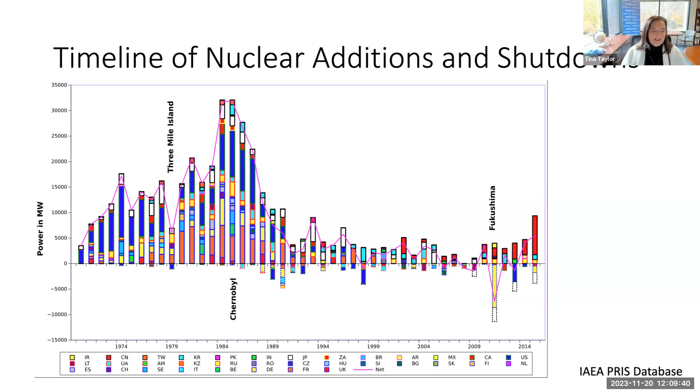So I want to help you to understand how and why things slowed down for quite a while, and that has an impact on where we're going in the future. So I mentioned most of our build happened in the 70s and 80s, was slowed down a bit after Three Mile Island. There weren't as many new starts. And after Chernobyl, some plants that were even planned or underway were canceled. So there was a slowdown in the growth of the fleet.

And then in the earlier part of this century, there was really a real slowdown for nuclear, where plants that were already built were shutting down, and kind of two reasons for that. One, as I mentioned, the Fukushima accident caused some countries to change their policies on nuclear. So a real example of this is Germany. They decided to shut down their entire fleet of nuclear after the Fukushima accident.

And then in Japan, new requirements were put in place to shore up their plants from impacts from tsunamis, which was the cause of the Fukushima accident, and from earthquakes. And that has required many plants to build large amounts of infrastructure for the Japanese plants that will allow them to restart. And right now, I think it's about 10 plants have restarted and another 9 to go. Not positive on those numbers, but that had caused a slowdown.

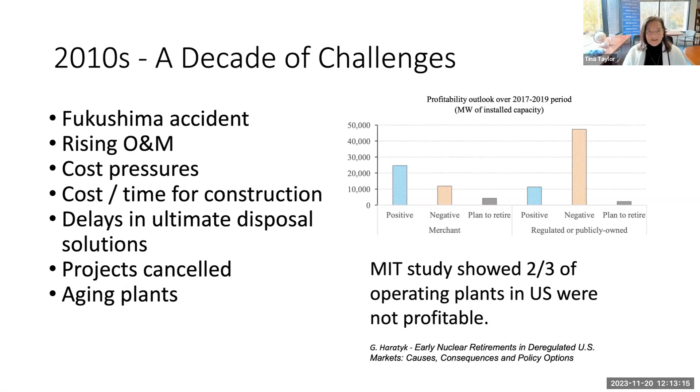And then going into 2020, we started to see these renewed opportunities for nuclear. And some of the drivers I'm sure you hear about every day these days: there continues to be an increasing focus on climate change and carbon-free electricity, huge needs to decarbonize not just electricity, not even just energy, but the whole economy. Continual issues that make us all aware of the need for robust and resilient energy systems. We've had storms, we've had power outages in different parts of the world. There's continual rolling constraints on need for more and more energy.

As we start to see the initial phases of electrification, that's causing more demand. I'll talk a bit more with some examples on industrial applications for nuclear. There's this whole growing industry around future low carbon energy carriers that will create a large demand for hydrogen, maybe ammonia, that could be produced by nuclear.

And then, there's been change over the last few years. We see a lot going on in geopolitics that really impacts the energy sector. So things like the war in Ukraine, for example, have caused impact to the energy sector all around Europe for many reasons. The energy flows have changed. There's been constraints on gas flow to different countries that trigger changes in the cost of electricity. It really has changed the flow between countries across Europe.

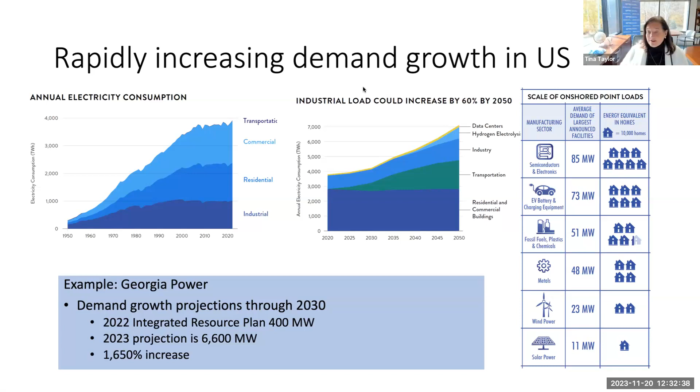France, I mentioned, has one of the biggest nuclear fleets in the world. They completed a large build. They had some new designs. They had, I think, one plant under construction. They're now going even more all in on nuclear. They announced this summer a plan to build 6 new large plants. It's a $52 billion program that they're investing in there, and they know they're going to need more beyond those 6.

Sweden had actually been in that phase where they were shutting down some of their plants. They shut down a couple of the older plants and didn't foresee a growth in electricity that was going to need them to build more plants. But just in the last couple of months, they've really shifted their plans going forward. And now they're planning a, quote, massive expansion of nuclear energy.

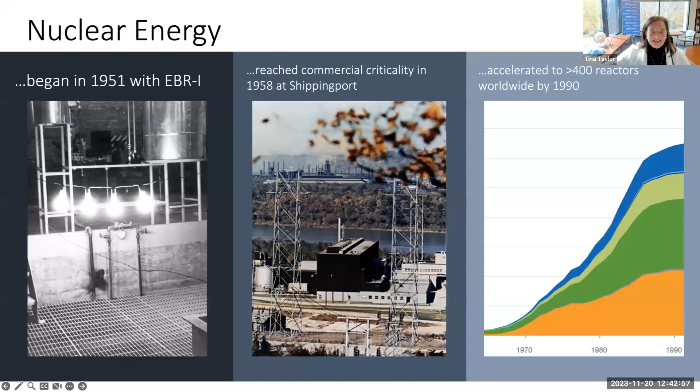So as I go into the future, I want to just hit again on this aspect of scale and what we've done before and what we need to do in the future. So nuclear energy in the US, there was an initial successful test in Idaho, I believe, in 1951. And then just 7 years later, we had our first commercial plant. That's not going to happen these days. Things do not move that fast anymore. And then from 1958 to 1990, we built over 400 reactors around the world. So a very rapid increase happened during that period of time. But that was 30 years to build 400 reactors. And if you think about what we've talked about so far, this idea of tripling from now to 2050 is a much greater challenge than that.

And we have been operating under this flat, very slow growth mode for such a long time that really shapes the industry we have today. In the US, there is now completing this one build of one plant, a 2-unit plant, Vogtle. Over the last 20 years, that's been kind of the sum total of nuclear construction in our country. Those plants are now finishing, and there is not another plant being built tomorrow for that workforce to just migrate to, even if that was feasible.

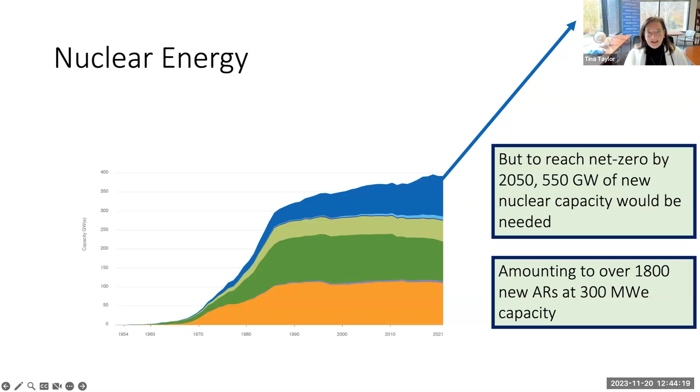So just try to have an appreciation for the fact that the slowdown, the stagnant, relatively modest growth that we've been under really shapes what the capabilities are to go on this rapid expansion. And I think that we will see a lot of reality seep in to some of these ambitions as we try to bridge that gap between a slowly growing, stagnant industry and one that needs to scale very quickly.

Kind of keeping on this theme of the amount of nuclear that's needed to be built. This chart, I think, probably has the same information as before, but you can see that the peak year for putting new nuclear on the grid was in the mid-80s, where we put just over 30, equivalent to 30 large plants on the grid.

And if we're going to meet these goals going forward, we know we can't go from 0 or 5 or 6 per year now to 30 immediately, but we will need the entire infrastructure to be able to build these plants to grow very rapidly, to get to any of these targets by 2050.

And we'll need to be doing every year from almost the immediate future to 2050 as much nuclear build as we have ever done around the world before. And I would say we have not been on a trajectory to ramp up to that point. So it'll create some of the challenges.

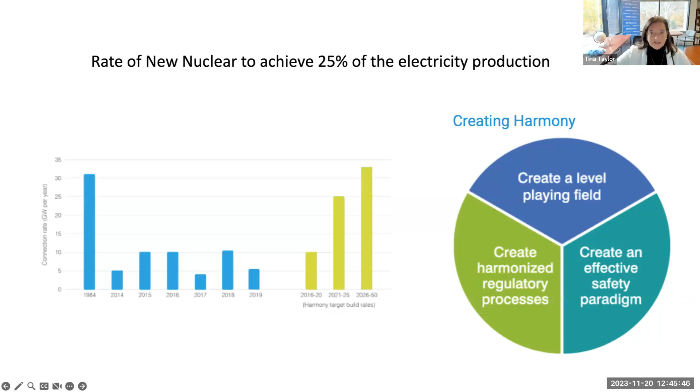We'll see. Most of what I've talked about so far is really aimed around electric production, but I want you to also know that industrial momentum is underway here. So most, if not almost all, of the nuclear plants today create electricity. That electricity goes on the grid and it gets used for a variety of things.

As we're moving forward, there's this desire and need maybe for many industries to be more directly coupled with nuclear. And there's some advantages to that, and some challenges to that. A big wave is coming in the IT and data space, because that industry itself is so rapidly growing. The, I don't know what you want to call it, revolution this summer over AI and ChatGPT and things like that is probably exponentially increasing the need for data centers around the world.

And those data centers and the companies that run them are under this same desire and constraint and regulation to become carbon free. So there's been a lot of work going on this summer, particularly around coupling nuclear with data centers directly. So a few announcements here. NuScale just announced a partnership with Standard Power to build 24 small modular reactors to power their data centers.

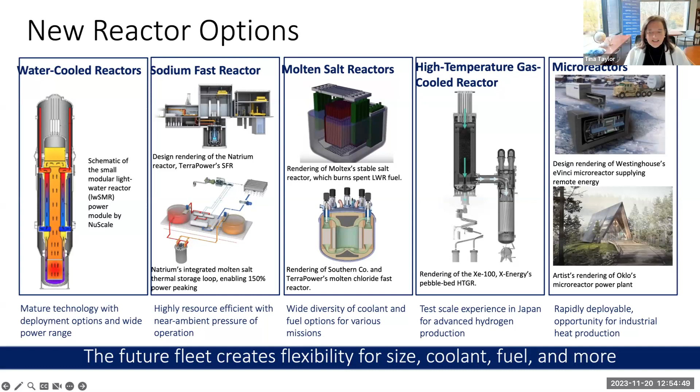There are many different designs out there. I'm not going to try and get you to understand all of these. Most of these designs, I will say, have been really fueled by this investment in the university system and in educating more young people who are then entering the workforce with entrepreneurial spirit, with a desire to save the world with clean energy, and a knowledge about nuclear, questioning how we can do nuclear better than we've ever done it before. So lots of new designs, lots of new companies emerging, lots of innovation in the technology space.

There's even innovation in the business model. One of the companies out there that I find very interesting is Last Energy. They have a design that's not really very new. It's a scaled down traditional kind of reactor. But they have been able to procure power purchase agreements for over $18.9 billion worth. And they're not doing it by selling people nuclear plants. They're doing it by selling people the electricity and the energy from nuclear plants.

And by really focusing on what they believe is a very easy to license and easy to construct small modular approach to providing that energy. So I'm very interested to keep my eye on them. They're doing something very novel out there, not so much on the technology side, but on the business side.

But here's the reality of where things are right now. This is actually a slide I used with you last year to talk about the new things that were underway. Some of it's positive and some of it's really slowed down. So TerraPower is planning to build a plant in Wyoming.

That project is delayed just by a couple years, I think, at this point, but it's been delayed. Just last week, there was an announcement of this, I don't know what to call it. It was kind of like the poster child for a good nuclear project. NuScale had been working with a utility called UAMPS in Utah to plan this carbon-free power project. This is the project that was highly supported by DOE to help with licensing and permits and design finalization. And last week it was canceled.

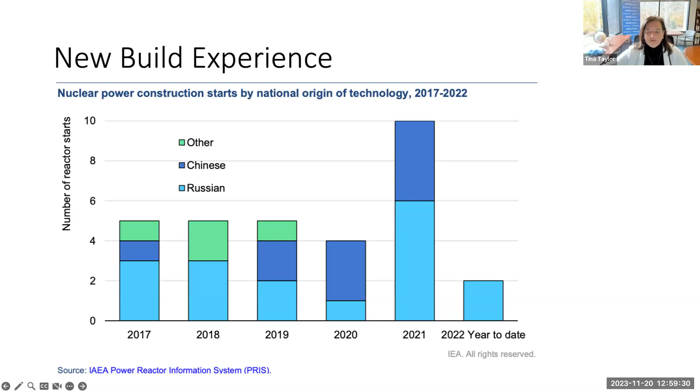I'll just mention most of the new build experience really has been with Russia and China, and that creates more of this challenge as many countries around the world are seeking to add new nuclear. And there's geopolitical tensions that dictate who will and who won't work with Russia, who will and who won't work with China to try and move their projects forward.

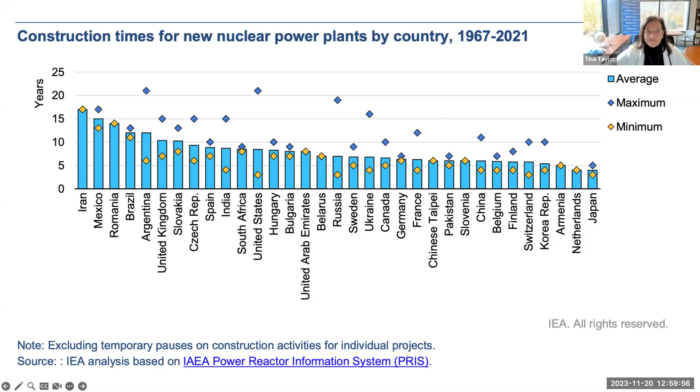I realize I'm running out of time here, so I want to hit a couple more points and then have plenty of time for discussion.

The need for cost certainty is huge. And that definitely contributed to the carbon-free power project I just talked about, because over the years, the estimate for what that cost would be for the electricity increased. And the cost, I think, could be high, medium, or low for nuclear to still play an important role in future energy decisions, but the cost can't be uncertain if businesses are involved.

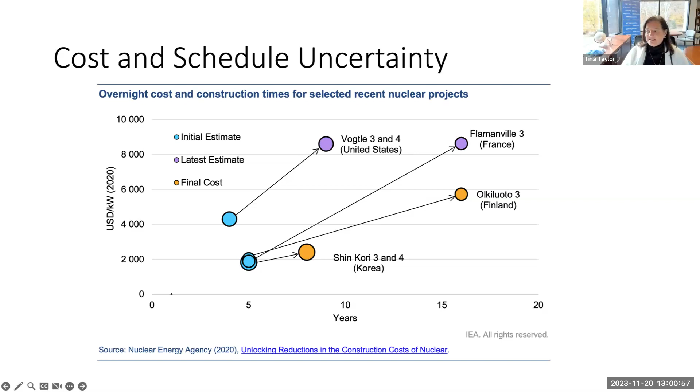If it's government programs, which is how it works in many countries around the world, then there's a bigger ability to bear that changing cost structure. But for businesses, they need cost certainty, they need schedule certainty to plan these. So those are some of the concerns and considerations.

Supply chain concerns are growing. They're growing rapidly. Maybe they definitely started in the nuclear space with the build of the Vogtle and the VC Summer plant, where the VC Summer plant was canceled. The lack of a robust supply chain impacted those plants on schedule, impacted those plants on costs.

I think we all became very familiar with supply chain impacts as we went through COVID and couldn't get toilet paper sometimes and couldn't get meat sometimes, and other times you couldn't get chicken. And we've been really living with that for the last 3 or 4 years, I think, as prices fluctuate quite a bit for the things we need to buy, and there's difficulty getting things at different points in time. It really heightens your awareness.

And this is probably the biggest discussion underpinning that reality check on all of the nuclear growth discussions that I mentioned. There's a lot of realization that a lot of work needs to be done to build the supply chain to support any of those nuclear ambitions. And this is all kinds of things. This is the large specialized components. It's companies that can perform work to a nuclear quality.

Workforce is a huge gap people see, both from the need to have highly educated, specialized workforce, and also just the trades, the people that will weld these plants together and pour the concrete. Big gaps to be challenged there. There's challenges in fuel.

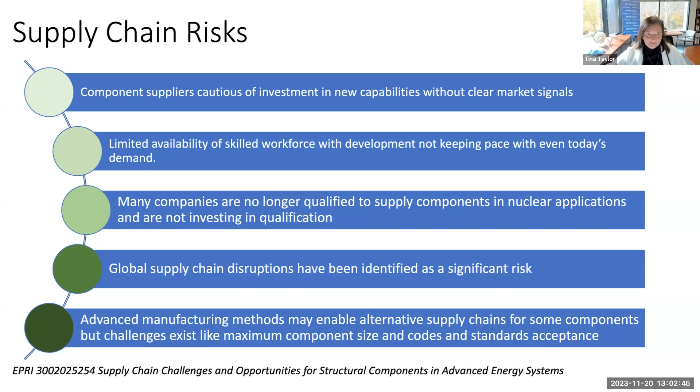Some of this is driven by geopolitics, particularly with the Russia-Ukraine situation a couple of years ago. That introduced a big shakeup in the uranium supply chain around the world, and that has led to a steep increase in the cost of uranium, which then kind of circles back and increased the cost of the production, the projected cost of electricity from these plants.

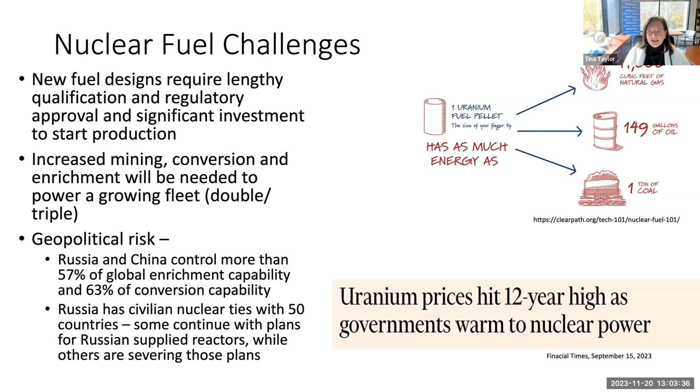The US government and other governments have been ramping up activities to create more production, but that's really probably only sufficient for the current fleet and moderate growth. As we start to encompass these very large builds, we're going to have to address this as a critical part.

Regulation is very important from the timeline of things. I'll just say that many countries are just standing up their regulatory paradigm. And the current idea of licensing every single plant individually will either create a huge slowdown, it'll create a need for gigantic staff at the regulator, or we've got to do it differently to support a very rapid succession of approvals and proper oversight for a rapidly growing fleet.

So I hope that that's given you a good feel for kind of the positive and some of the challenges. Personally, I think the future is full of opportunity. But there are these challenges that'll need to be overcome to actually unleash that opportunity for nuclear.

So let me just check the chat for a few questions, and I'm happy to take questions verbally as well. I will come back to some discussion on space and fusion if there's time after questions.

And then there's a question here about co-locating generation and the load. There are challenges there, and there's really just the beginning of some real demonstration there. So I think on one of my earlier slides, I had the Constellation hydrogen pilot going on.